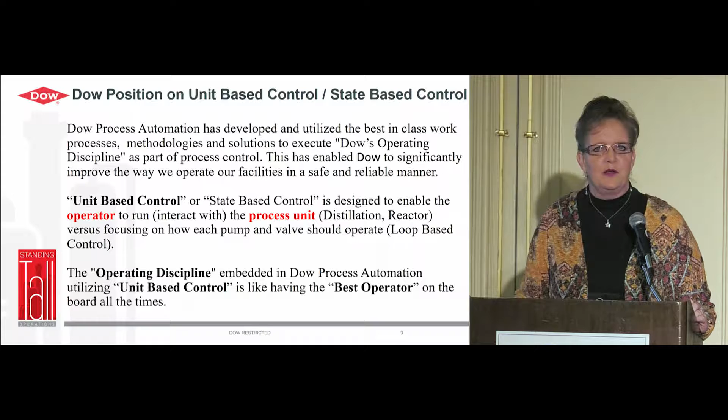And so basically, state-based control or unit-based control is designed to enable the operator, for the most part, to interact with the chemical process at the unit operation level, as opposed to always being at the individual device level. And that's embedded in all of our programs and allows us to operate as if the best operator was on shift at all times.

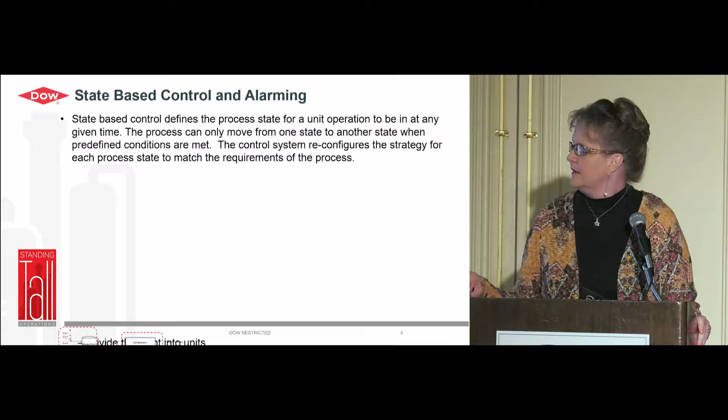So the way this works is we break the process up into units and define the process state for each unit operation that it will be in at any given time. The process can only move from one state to another when predefined conditions are met. And based on the process state, the control system reconfigures the strategy for each element to match the requirements of the process. So in the design phase of our plants, the first thing we do is we break up the process into individual process units, typically a distillation column, a reactor, something like that. We define the process states for each unit and the paths to move between them and the conditions.

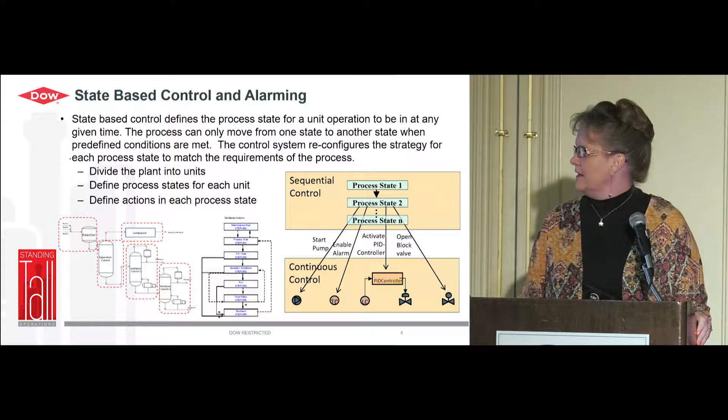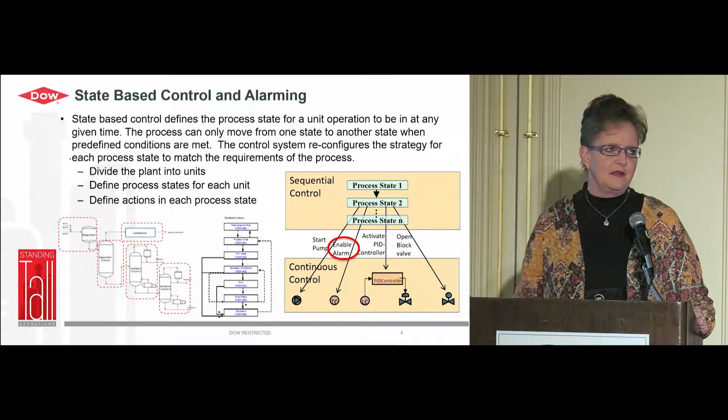And then we define the actions in each process state, such as when to start a pump, when to open a valve, when to activate a PID controller, and when to enable our alarms. And so this concept of dynamic alarming and doing the enable correctly the first time, designing it correctly the first time that Bonnie mentioned, is something that's been ingrained in our culture since before 20 years ago when I started in process control.

So as far as design principles, these are probably some pretty generic concepts that everybody's familiar with. We do use alarm justification as a structured approach to evaluate each alarm before we program it. We require that when we're installing a new control system and highly recommend it when upgrading a control system.

We attempt to implement effective alarms which focus the operator attention on the areas of highest priority, and if we do that right, as Bridget was saying, that can positively impact our safe and efficient operation of the plant. And so when we're designing the alarms, try to keep in mind if we can't identify a specific operator action or action that the control system should take relative to that alarm, you may need to really think about if

that's needed at all. If the alarm is needed, we want to make sure that we develop smart alarms with correct set points, deadbands or delay timers to prevent chattering, and enable the alarms only when they are relevant. And in our case, we do that with state-based alarming plus additional conditions in some cases.

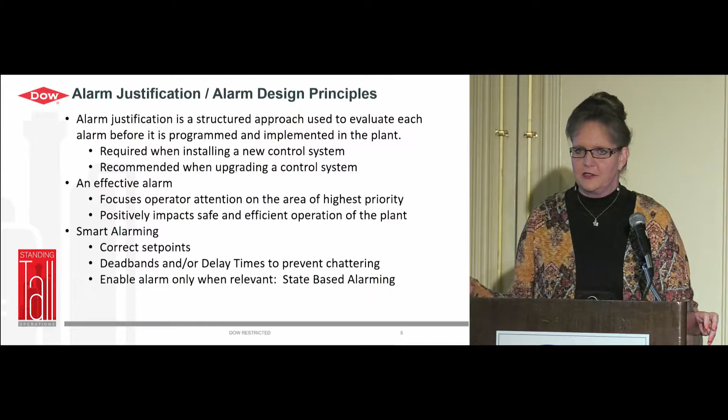So when we're designing our alarm strategies, we use within our design documents something called action tables, maybe similar to what other folks do. But we've got the process states across the top here and the different alarms down the side. And basically, we look at what the process is doing in each state and determine if each alarm is relevant in that state.

So just as a quick example, a high-pressure alarm is probably relevant all the time, unless maybe this is a vacuum column, in which case you don't want to ring a high alarm until you've established your vacuum. Low-level alarm, on the other hand, probably when you're down for maintenance or have just entered a fill type process state, you probably don't want to be telling people you have a low alarm because you just do by definition.

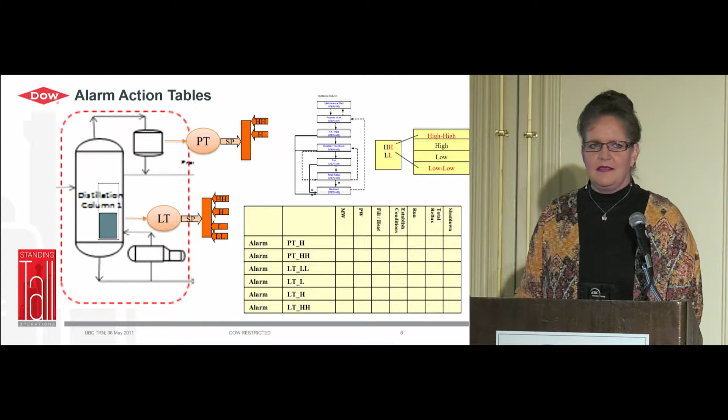So this alarm design concept is something that Dow has historically done, I'll say, pretty well on our projects. However, as everyone knows, life happens, process conditions change, and maybe the alarms are not updated as appropriate and such. And so even well-designed systems can fall into a state where maybe they're not operating as well as they should or they did. And so we do have an alarm rationalization process that we implement. So that's a structured approach to evaluate each alarm in a running facility.

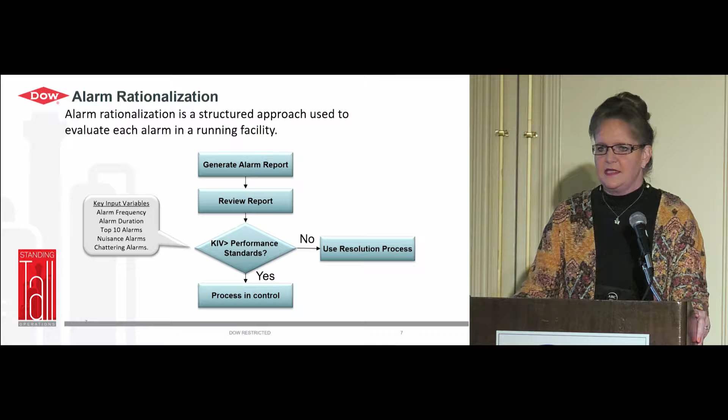So pretty high-level diagram here, but basically we need to generate an alarm report, review the report, compare the key input variables versus performance standards, and if we are okay, then no further action is needed. That's not always the case. And so if we identify issues, there's an alarm resolution process that we can use. And some of the key input variables that we typically monitor are the alarm frequency, duration, top 10 alarms, nuisance alarms, chattering alarms, and potentially others as well.

So again, before alarm rationalization can begin, we have to have good reporting. We need an initial reporting baseline and then ongoing reporting at defined intervals so that we can track our progress. The report content, so we have developed, we use mostly an in-house tool that was based on one that we had for our legacy process control system.

We've refreshed that recently, and now we can pull in data to that same tool from our legacy plants, as well as our new commercial DCS installations, and the team is working on adding additional capability to pull in data from additional control systems as well into the same tool.

So we typically report on alarm duration and frequency, and there are other statistics available as needed for a given plant. And we also track manual interactions and parameter changes because we have found a correlation between a high level of manual interactions and parameter changes and alarms. It's kind of an overall operating philosophy. It either runs smoothly or it doesn't.

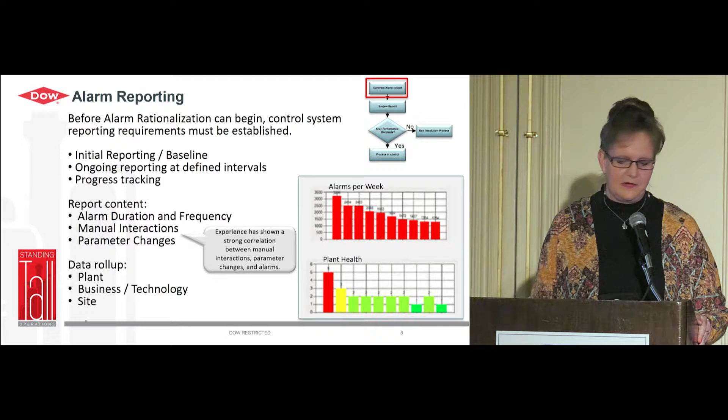Okay. So once we have our reports, we do have a documented alarm resolution process that the plant folks can use as a guide. It is important to get the right people involved in this. You need someone from process control who can fix the issues, someone from the plant who understands the reasoning, and then also, as I mentioned, the motivation from leadership can be very helpful also.

So basic process: select an alarm for resolution out of the report, a bad actor. Is it justified? Is the operator action known? Is it a safety requirement? If there's not a good reason to have the alarm, you probably just want to get rid of it. If you don't need to get rid of it, then how is your instrument? Is it because of an instrument failure? A lot of the causes of our bad acting alarms is we have a problem in the field, so you really need to go get the instrument fixed and make sure it's operating properly if it's important enough to alarm off of.

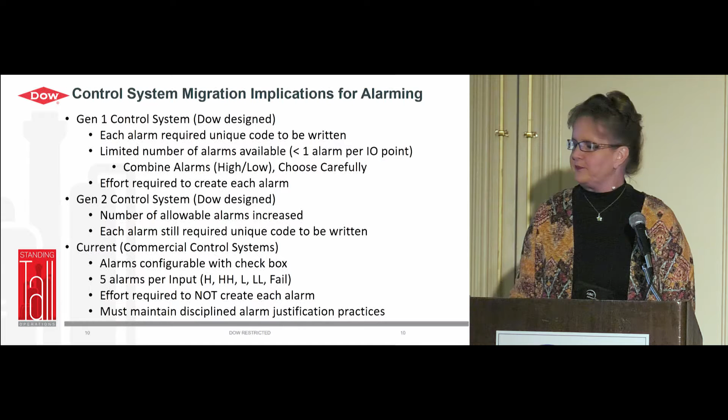And one final point I want to make around alarms and migrations is just the potential implications of subtle differences in the default behaviors between the old and the new control systems. It's very important to understand all the details. For example, how does a high or a low alarm behave if the instrument fails?

In our legacy system, we typically implemented our code with templates, and we had a choice. We could choose to make the alarm ring if the instrument failed or suppress the alarm if the instrument failed. There's probably good reasons to do either one, but the point is there probably is a default behavior in your new system that may or may not match how you have your old system programmed. And it's very important to understand that and then have that discussion with the plant.

And ideally, we think, if you can, implement the standard functionality of the commercial control system as it comes. You'll save yourself some work, and that's some of the advantage of having a commercial control system, with predefined objects and such, to just implement the functionality as it comes.

But you've got to make sure that that meets the needs of the plant, and even if it does meet the needs, if it's a different behavior than they had before, make sure they understand that, they get well trained on that, so they're not expecting either an alarm or even an automatic action that's now not going to happen because of the difference in behavior.

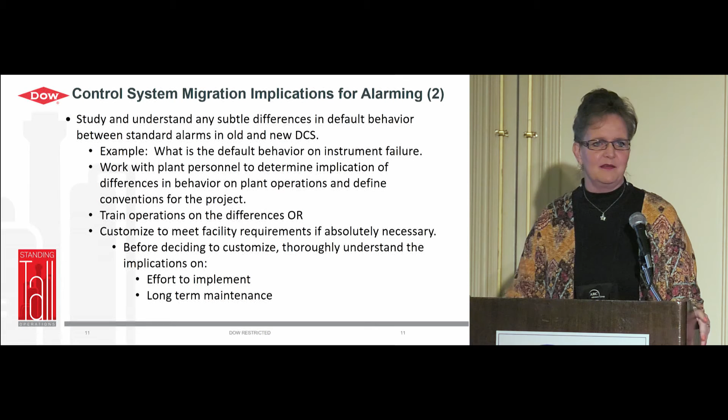And if the default behavior will not meet the needs of the plant, of course, there's the option to customize the code. You can pretty much make it do whatever it needs to do. But there is a price to pay for that, both in the project execution and also in the long-term maintenance. Typically, when you get to upgrading to the next version, some of your customization might cause you some extra work, as well as the work during the project execution.

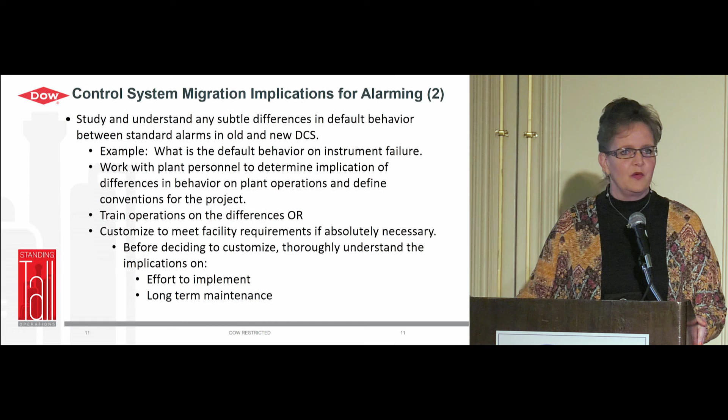The most important thing is that the alarms meet the needs of the plant, so if you need to customize, you need to do it. But it's just important to study all of the implications and make sure that you understand what you're putting in, what the cost would be to customize, and

Sorry, I hit something I didn't know I hit, and it distracted me.